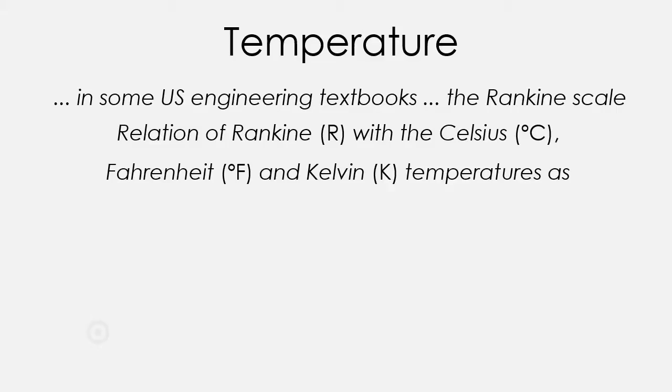Who was Mr. Rankine? The Rankine scale was named after the Scottish engineer William John Macquorn Rankine. William Rankine worked as mechanical and civil engineer. Apart from his career as professional engineer, from 1855 he was professor of civil engineering and mechanics at Glasgow University.

He was one of the great contributors to the science of thermodynamics. Many of his studies were focused on the efficiency of heat engines and the science of energetics. He wrote several engineering treatises, the one on the steam engine and other prime movers being a reference manual for many years in the 19th century. He got international recognition and became a member of prestigious institutions.

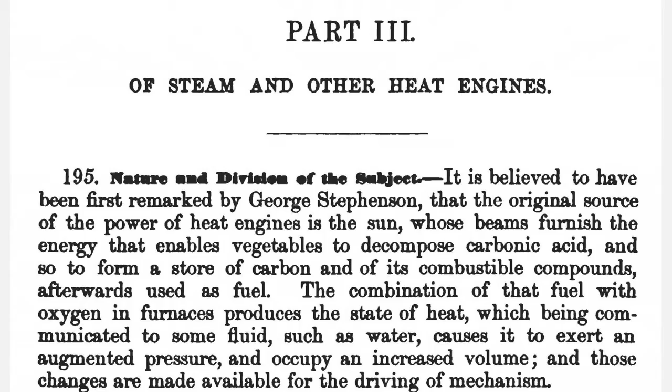William Rankine published in 1859 his Manual of the Steam Engine and Other Prime Movers. In Part 3, Rankine described first the furnaces and boilers which supply heat from burning fuel, and second, the engine by which the heated fluid performed work by driving mechanism. Previously, he discussed those laws of the relations amongst the phenomena of heat and mechanical energy, which constitute the principles of thermodynamics, upon which the work and efficiency of heat engines depend.

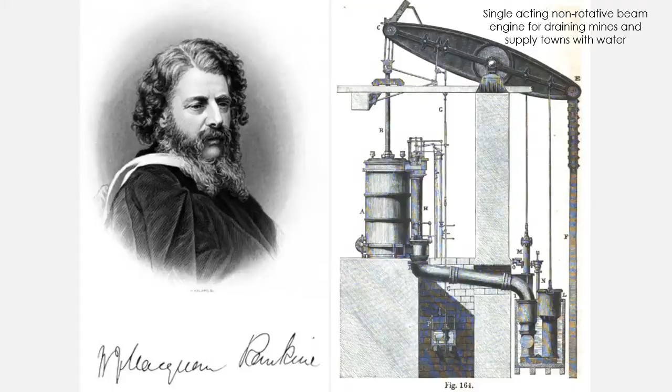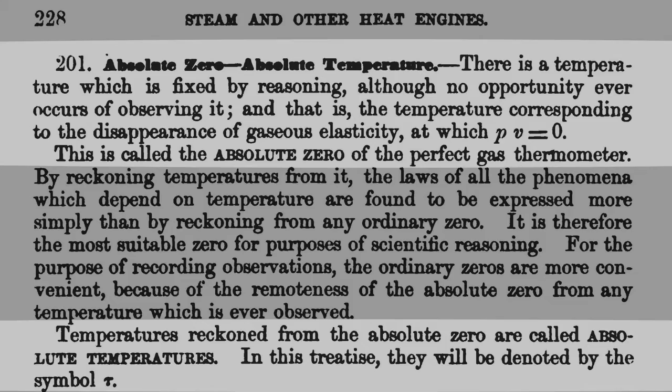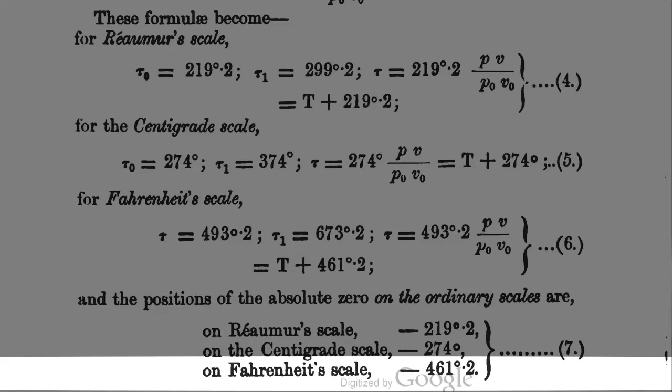When presenting the temperature concepts and ideas, Rankine introduces the definition of the absolute temperature scales in relation to the ordinary scales. Thus, in relation with the Fahrenheit scale, he proposes the respective absolute temperature where the absolute zero corresponds to minus 461.2 degrees Fahrenheit. This absolute temperature scale will be named afterwards as Rankine scale.

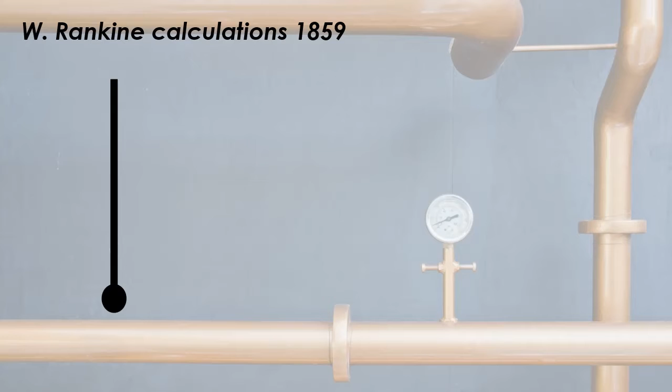With regards to the data available by 1859, Rankine's calculations for the absolute zero of the centigrade scale led to the value of minus 274, very close to the minus 273.15 of today's calculations. This scale corresponds to the present Kelvin scale, proposed in 1848 by William Thomson, Lord Kelvin. Rankine's calculations for the absolute zero of the Fahrenheit scale led to the value of minus 461.2. Today's value is minus 459.67.

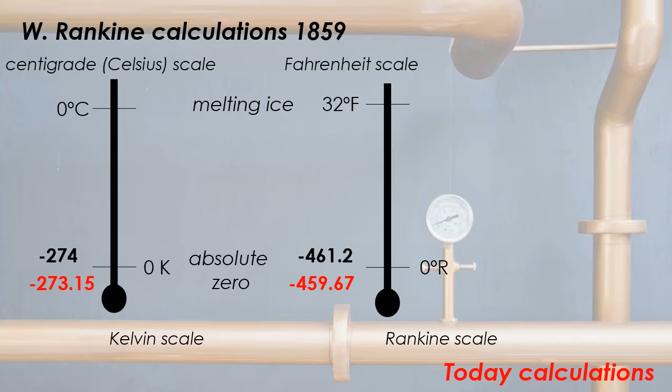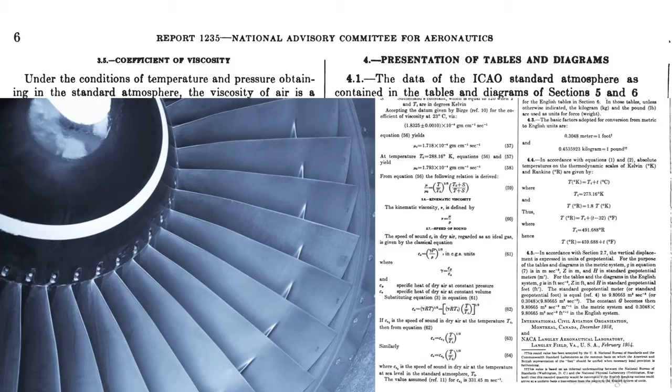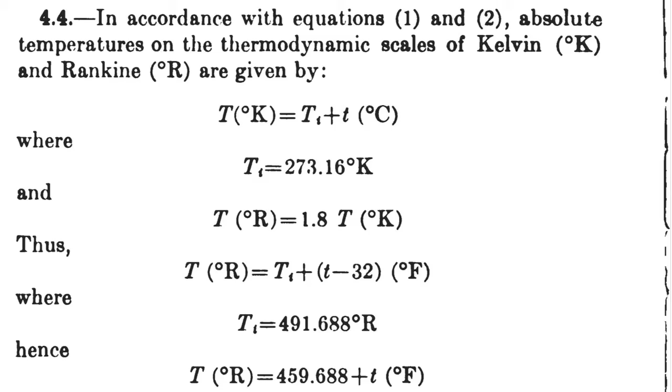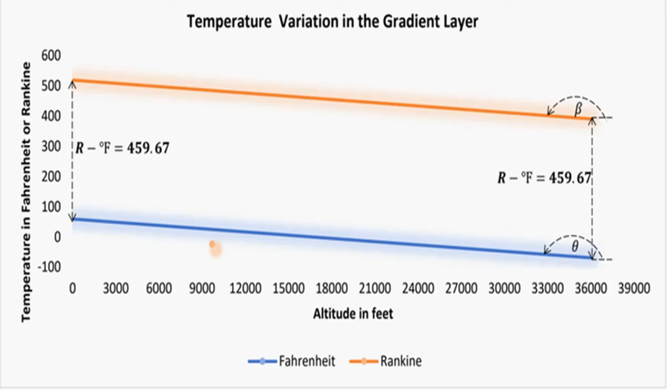Nevertheless, the Rankine scale is very scarcely used. It seems that during the second half of the 20th century, people in the United States were creating programs and using equations that needed an absolute temperature, and they used Rankine before Kelvin became dominant for scientific calculations. The reason people still sometimes use it in the aerospace industry is that there are a lot of programs that were developed using Rankine. So, to be compatible with those old programs, it's often simpler to just use Rankine in the new programs too.